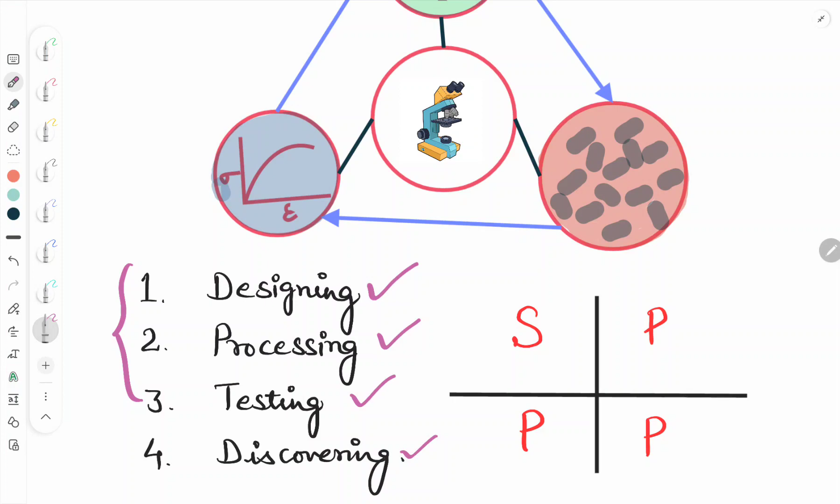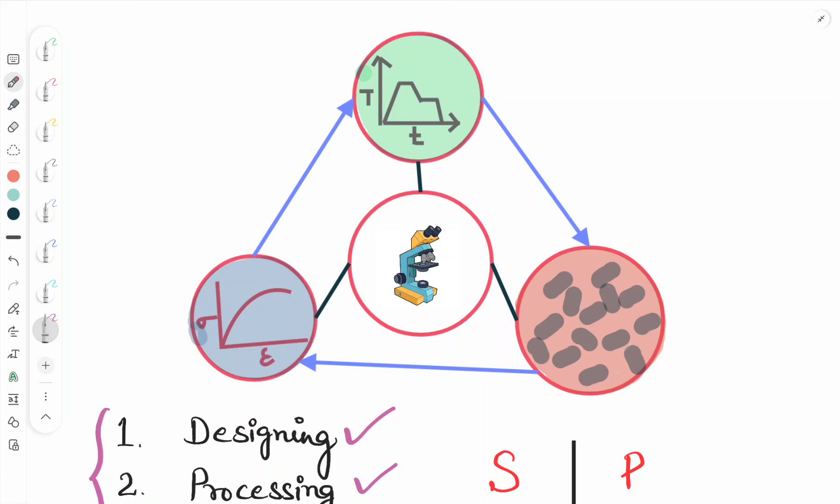Materials engineering is basically about designing, processing and testing, and with these three combined there is discovery of new materials, mainly solid materials. If we are trying to discover any material, we will see a few criteria: first is the structure of the material, second is the processing conditions, and what are the properties exhibited by that material, and how is the performance.

So this is the model on the basis of which we see materials discovery: first structure, processing, second, third property and performance. This is how we try to discover a new material.

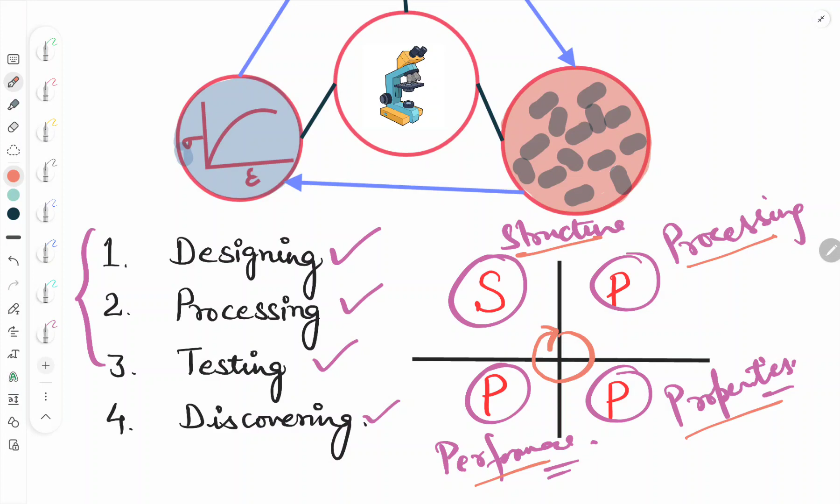Suppose if we have chosen any material, with the processing conditions we will see what kind of treatment we have given to that material, and what is the microstructure of that material, and what properties are exhibited by that material. This microstructure will be evaluated with the help of some characterization techniques.

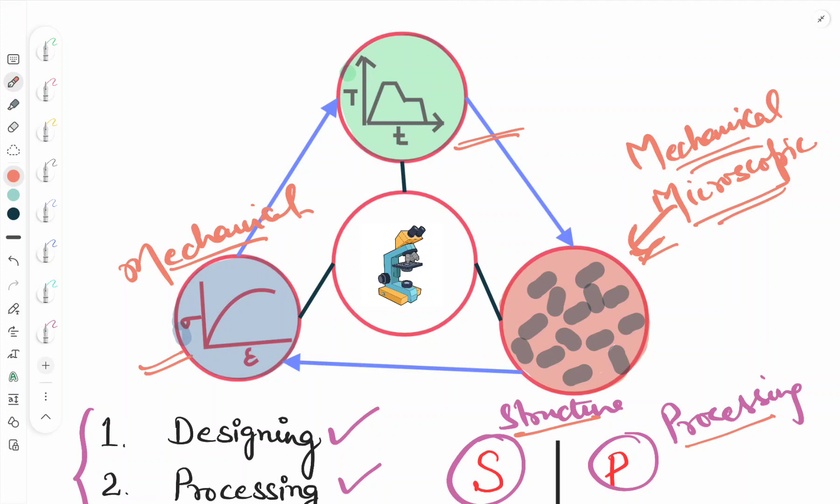There are material characterizations, in which mechanical characterization is one, and next is microscopic characterization. With the help of these conditions we will pick out the exact material for some specific application.

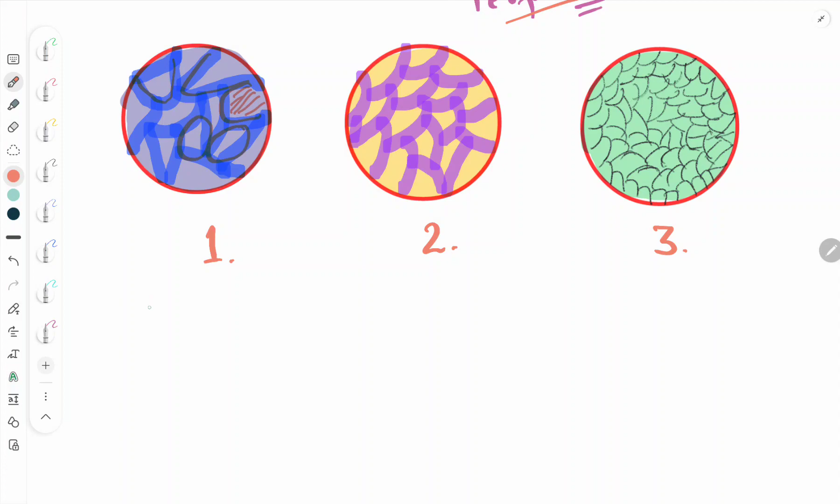Now there are different kinds of microstructures of materials. In the first condition, we can see bigger kind of grains. If we consider this picture as a grain, this is bigger grains, so this is coarse grain. In that case generally the material will have a lower strength or lower mechanical property.

One of the mechanical properties is strength. In this case we can see fine grains, smaller than the first condition, so the strength will be higher.

And if we see the third case, that is ultra fine grains, this will give high strength. So generally the mechanical properties of a material are defined by its structure.

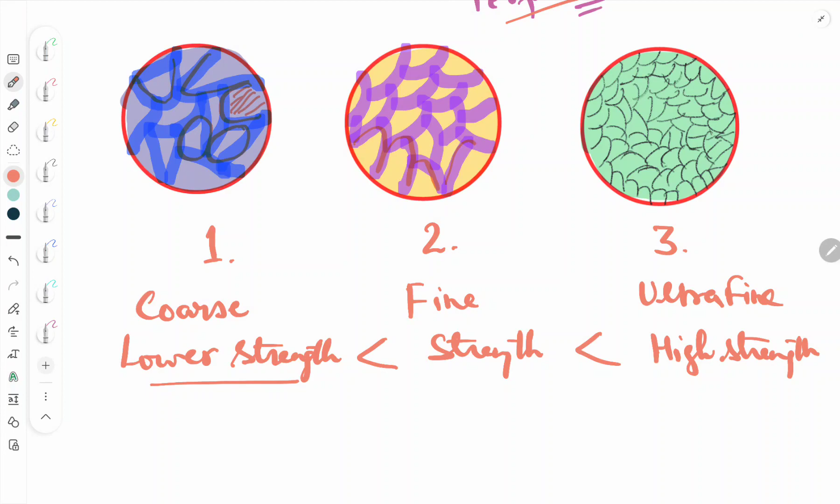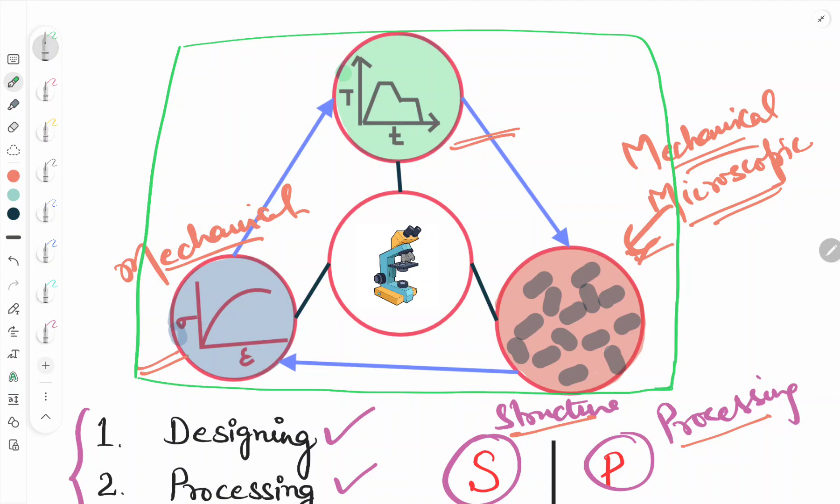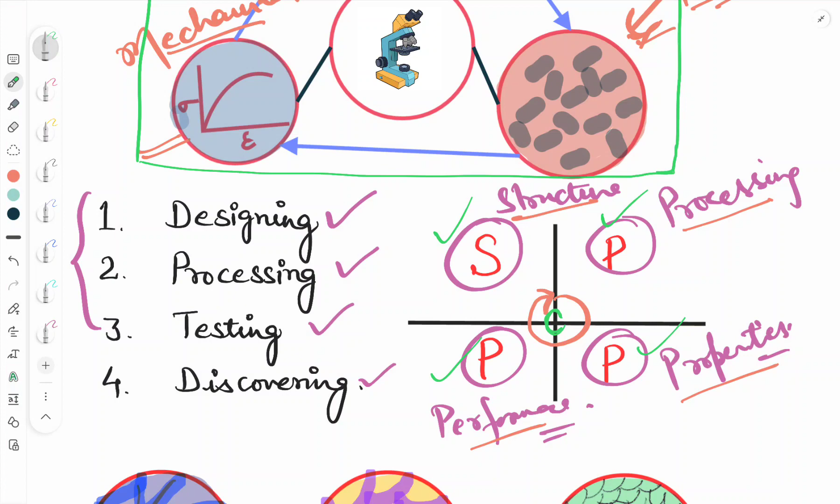Generally if anyone does a Google search just to know what is materials engineering, they will first see this kind of picture that tells about the structure of the material, the processing condition, the properties of that material, the performance of that material, and what kind of characterization is used to know about the microstructure of that material. Generally we will see this kind of tetrahedron about materials first.

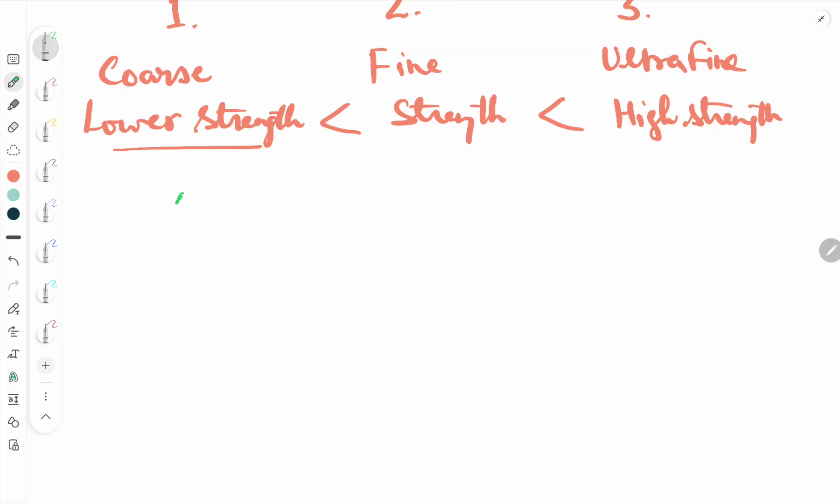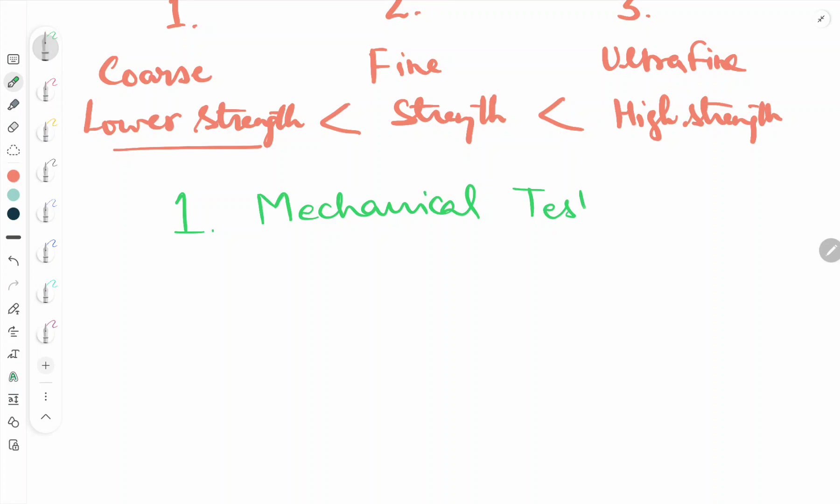Now we will see some other things, like if any material is put into application, before that there are basically two criteria the material has to go through. First one is testing, that is mechanical testing or mechanical characterization, you can call it.

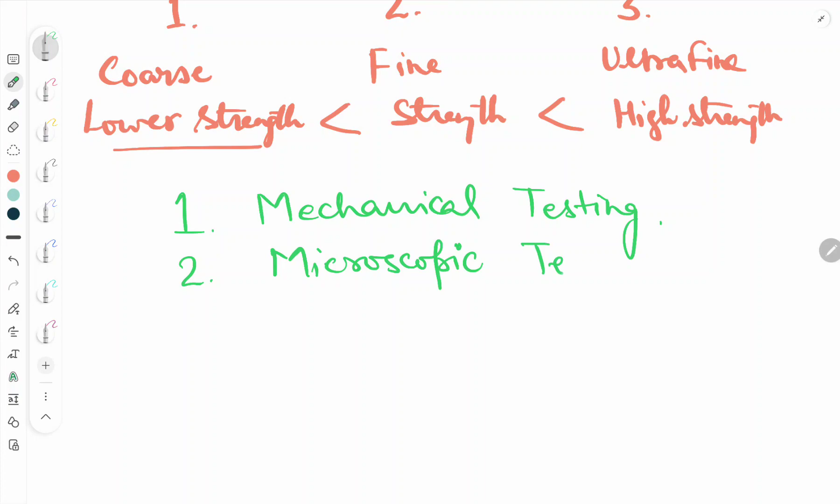Second is microscopic testing, that is also a kind of characterization. These are the characterizations which we perform before using the material in service conditions or in application for any purpose.

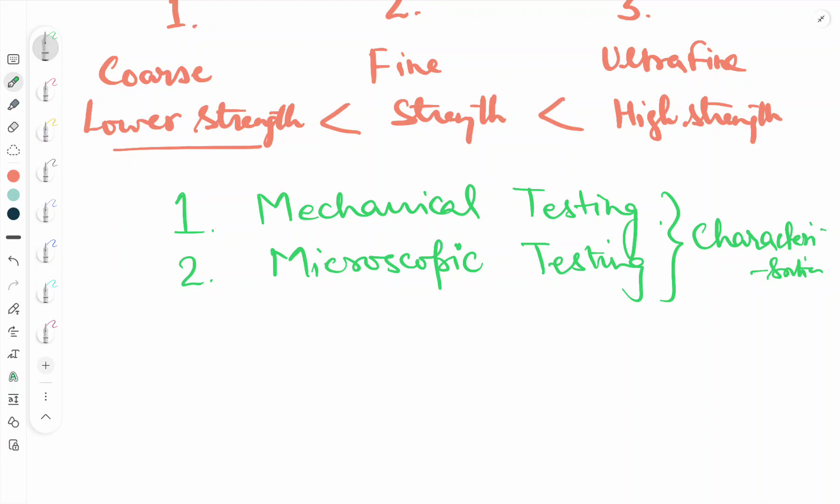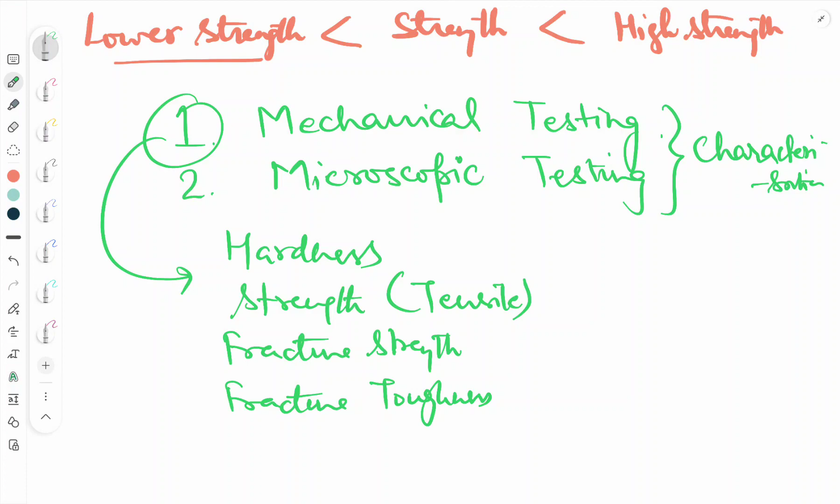In mechanical testing, for the first case, generally we do hardness test, we do strength test, that is basically tensile strength or tensile test, we do fracture strength test, and fracture toughness test. These kinds of tests we usually do to qualify the material for a service condition.

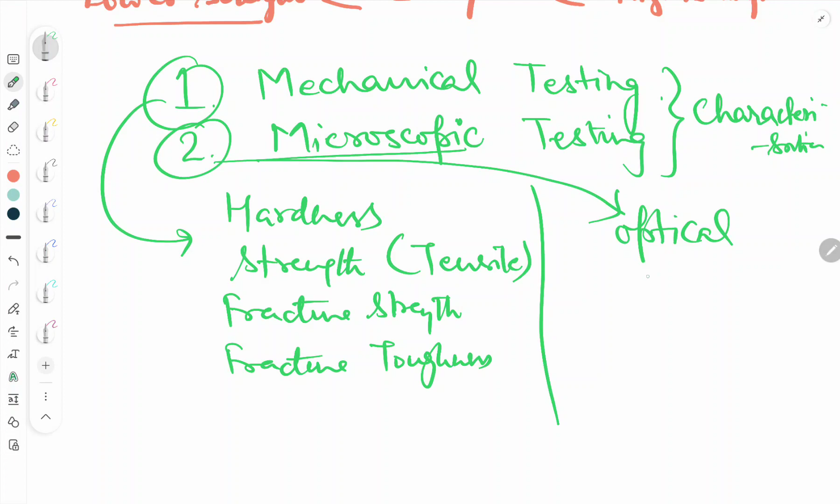About microscopic testing, we do optical microscopy, just to know about the microstructure of a material at a lower length scale. Then we go for SEM, that is scanning electron microscope, then TEM, that is transmission electron microscope.

In the modern era, with the availability of characterization tools, we have some advanced tools through which we can know the fraction of precipitates available, or the shape and 3D picture of the precipitates also. For that we can go up to APT, that is called atom probe tomography. So this is how we go about the characterization of a material, mechanical or microscopic characterization.

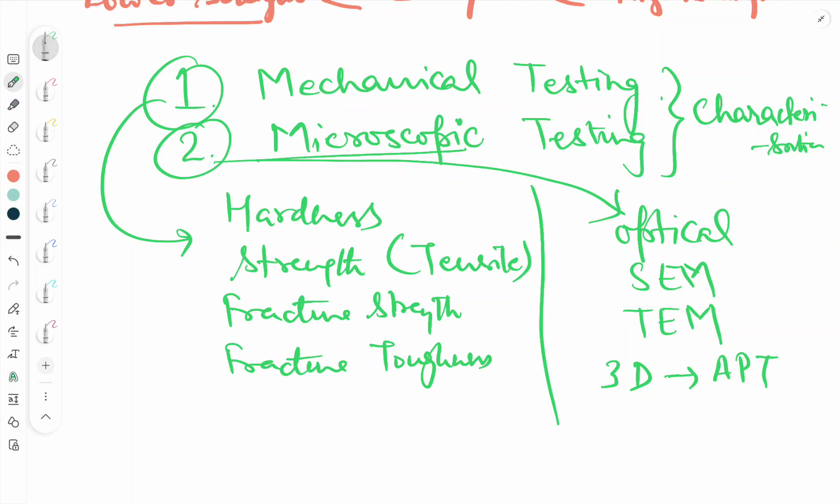So now we will talk about the careers and opportunities in which materials engineers can work and explore this engineering field.

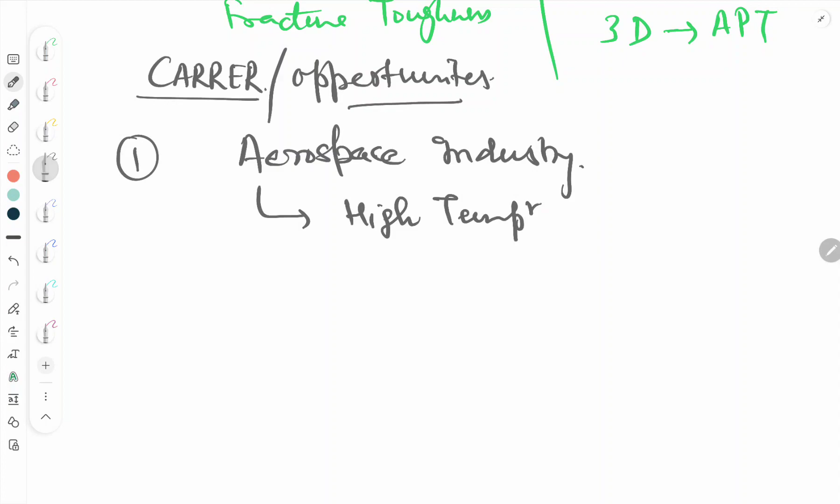So first is aerospace industry. Here materials are exposed to very high temperature applications, like for example, if there is a jet engine, it will have some major components: first is compressor, next is injector, then combustion chamber, then the gas turbine, and the last here will be that jet exhaust nozzle.

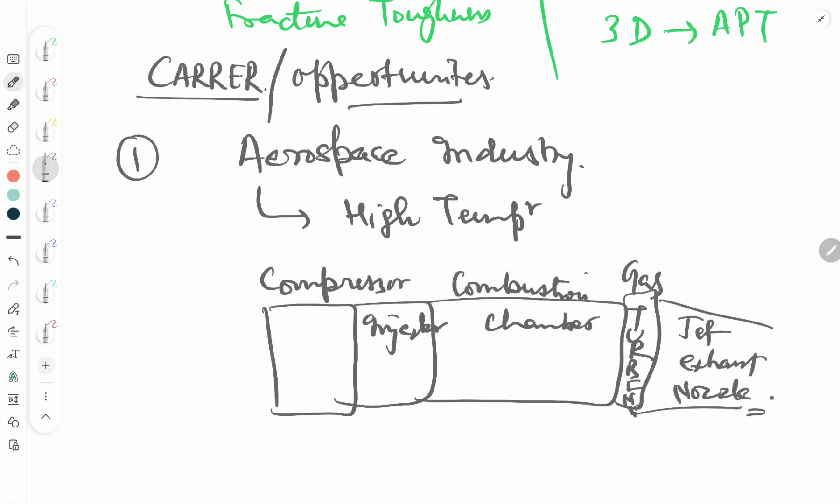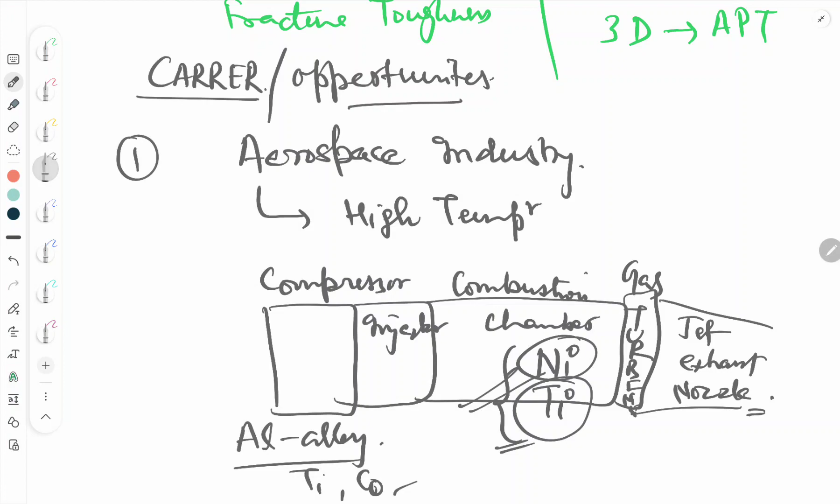So in the jet engine we have different sections, and in those sections we need different kinds of materials. Like in the combustion chamber we use Ni based superalloy, Ti based superalloy, because these alloys have higher strength at higher temperature. A jet engine also requires many kinds of alloys like aluminum alloys, composites, Ti alloys, and cobalt based alloys. So this is how it requires different kinds of materials. This is how materials engineers can explore well in the aerospace industry.

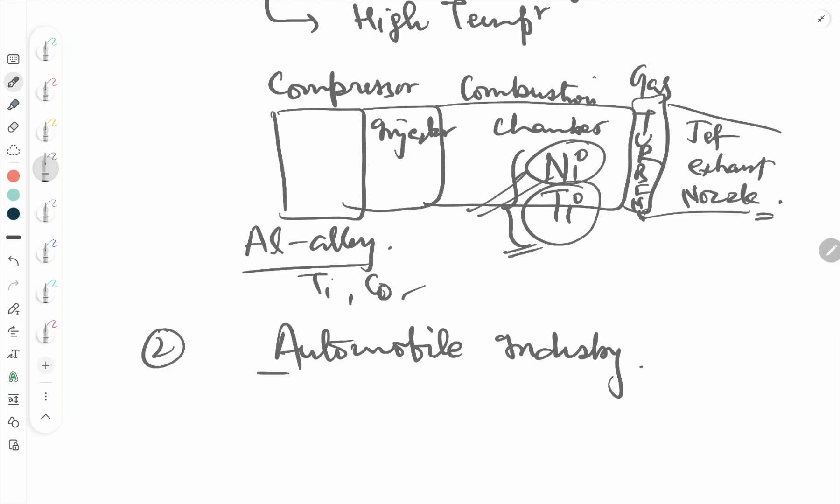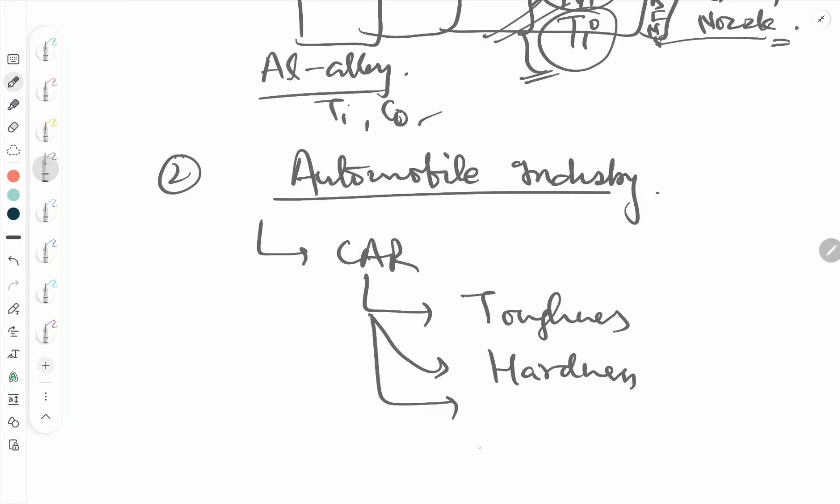And the next one is automobiles industry, in which if we have a car, it has different parts, some having very high toughness requirement, some requiring very high hardness value, some requiring wear property, some requiring resilience, and some a combination of strength and toughness.

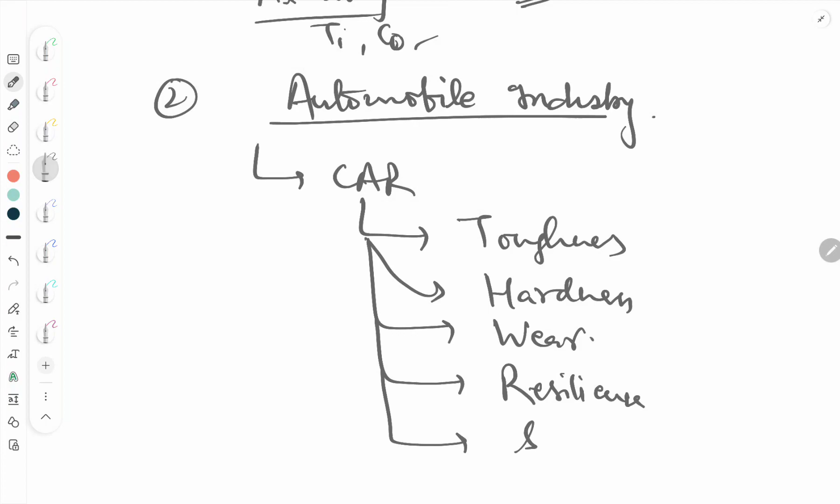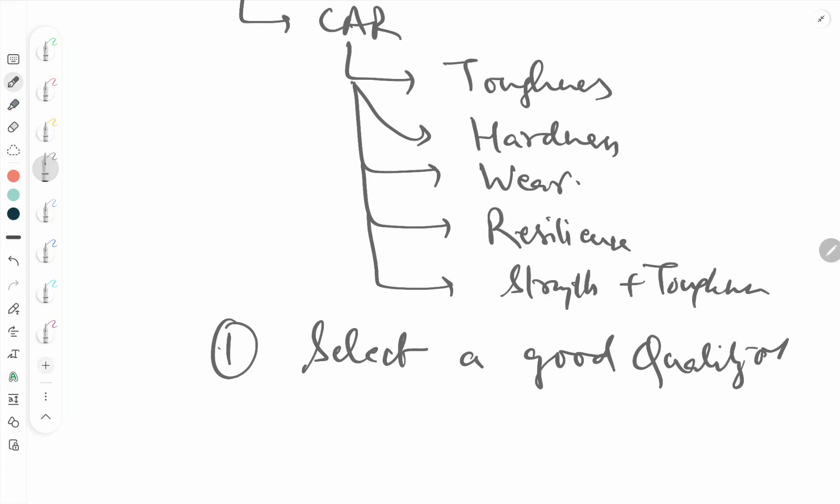So this is how one can explore well in the automotive field to select a good quality of material to provide a quality automotive component.

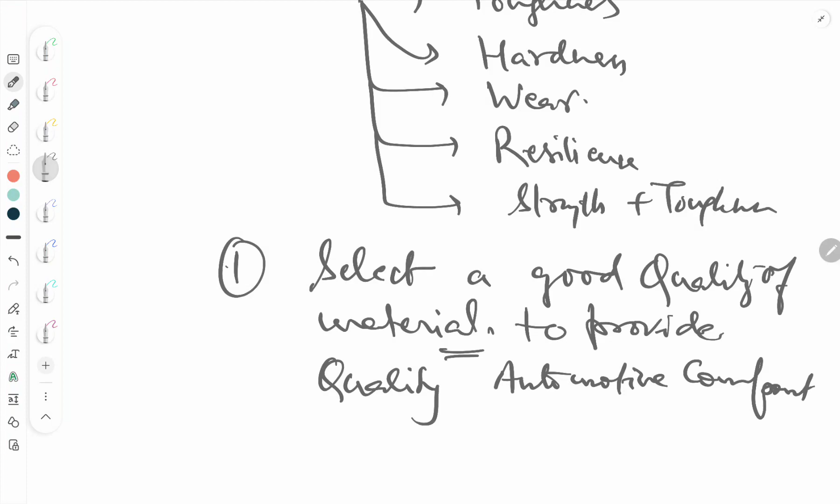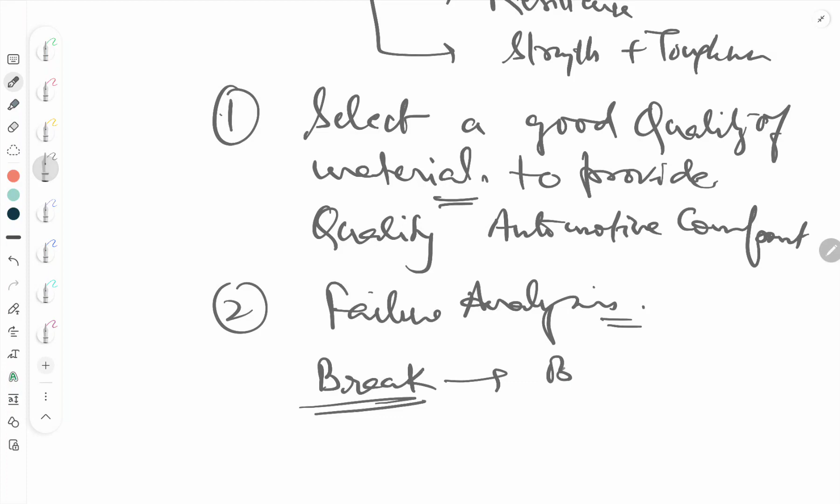Next is failure analysis. So in any industry, if any part breaks, the broken part will be taken to the laboratory for different kinds of microstructure analysis. That is also the most important field in which materials engineering can explore well.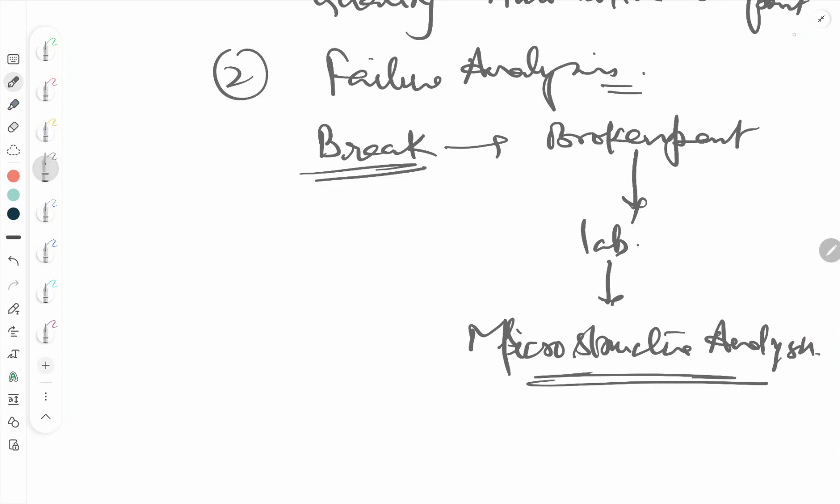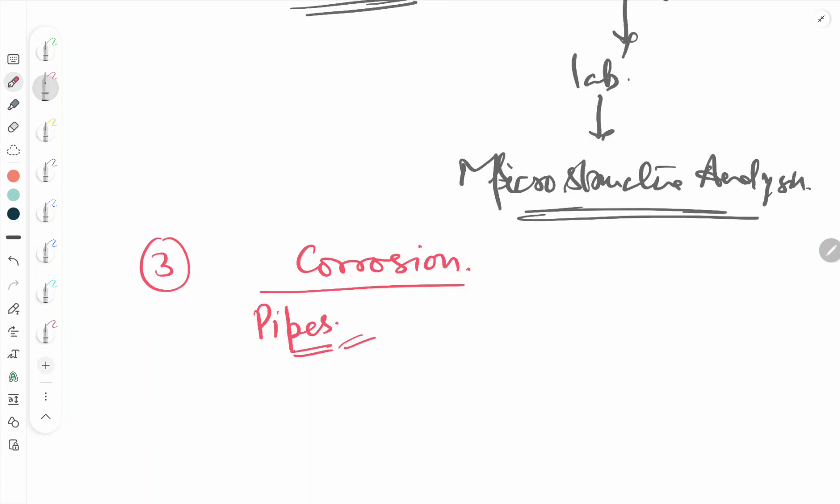After aerospace and automotives, we'll come to the third one, corrosion. Many pipes are subjected to the flow of different kinds of fluids, and many components are put into water, or different kinds of things like fresh water, salt water, oil. So the material is exposed to different environments, due to which the chances of corrosion are different in every case. So one can explore well in the field of corrosion to increase the life of a material and reduce the corrosion rate also.

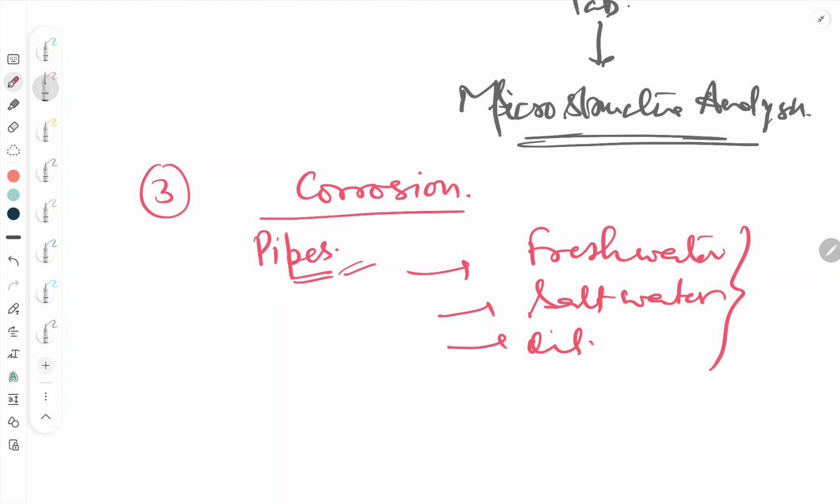And next is biomaterial, by constructing or making artificial organs, or to replace bones or tissues.

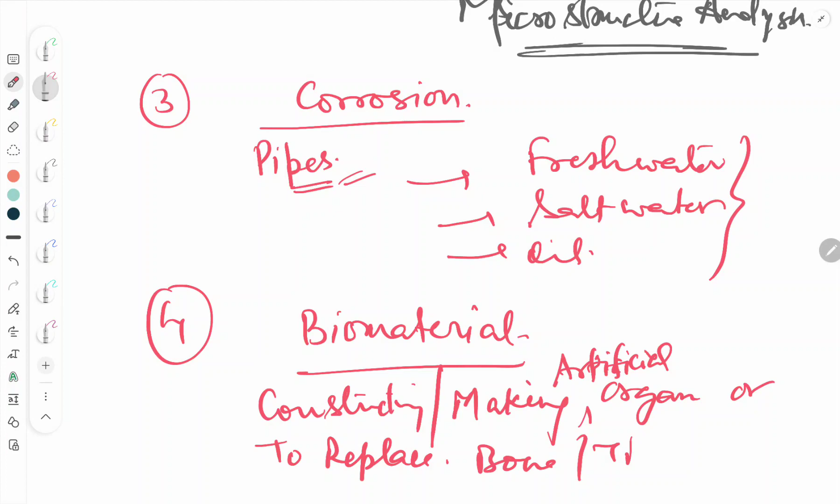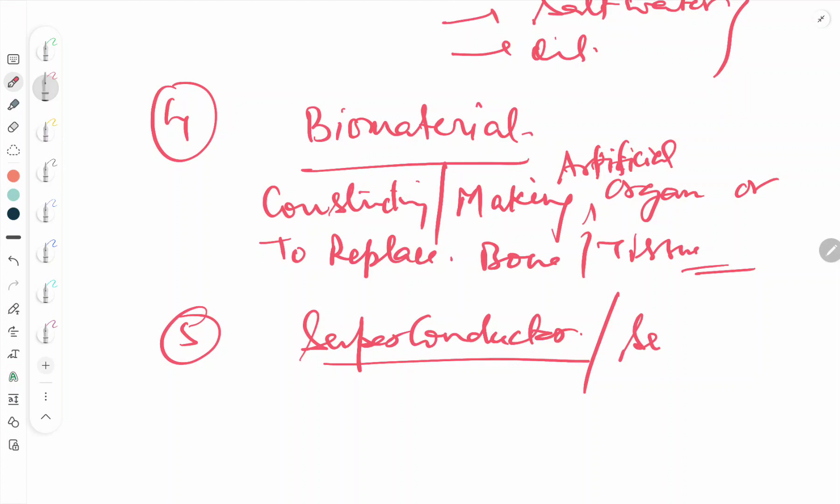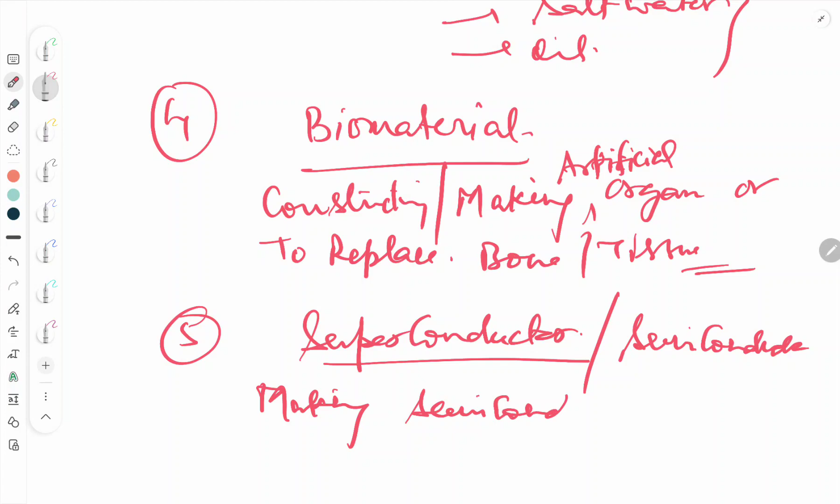And one can also explore in the field of superconductors, at semiconductor fields, making semiconductor devices. As the world is leading towards digitization, the requirement of semiconductors will increase day by day.

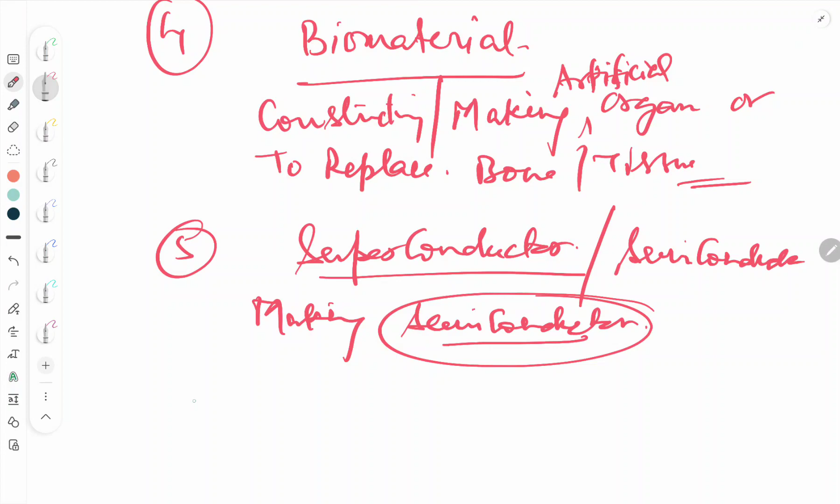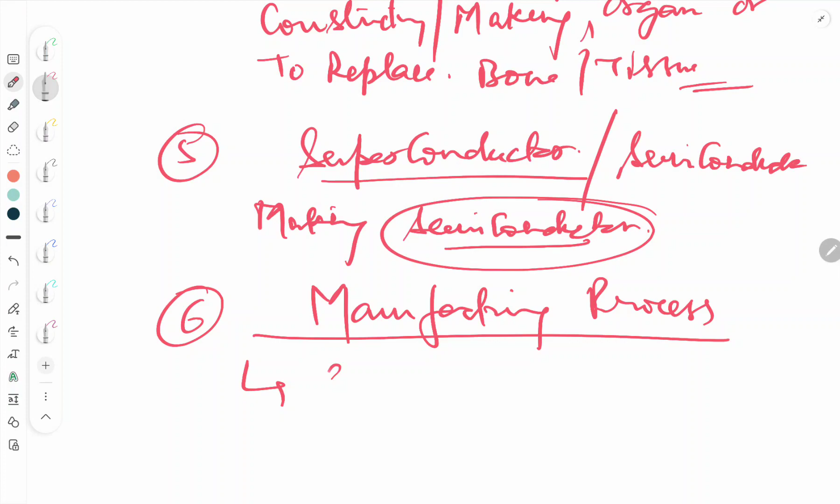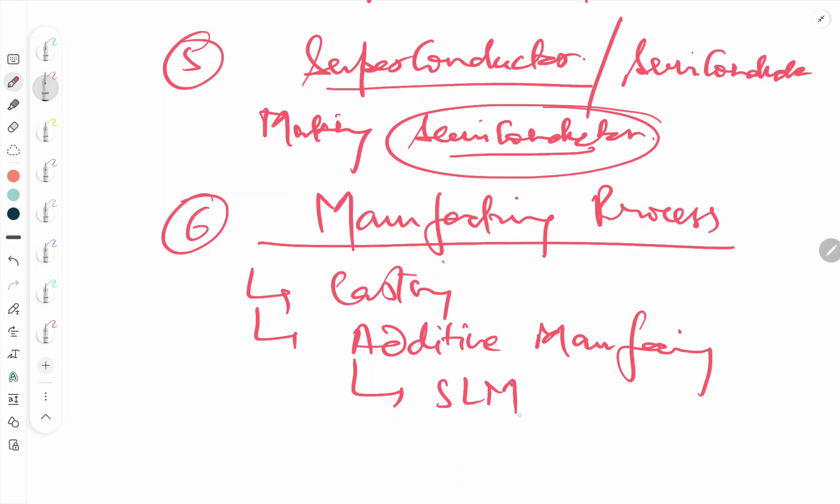And next, manufacturing processes, like how the component is being made. Previously we made things by casting, and now the era is moving towards additive manufacturing, in which there are some most common techniques like selective laser melting and direct energy deposition, in which people are trying with laser and powder for the same. So this is how people can explore well in the field of manufacturing process for developing useful materials.

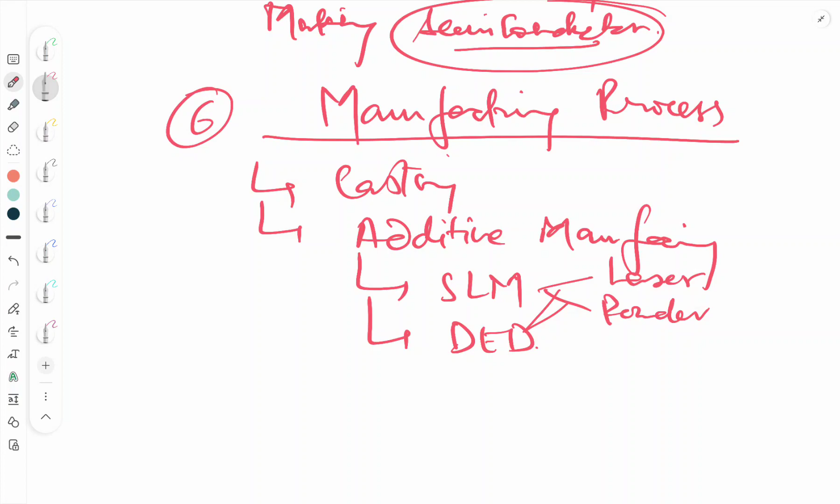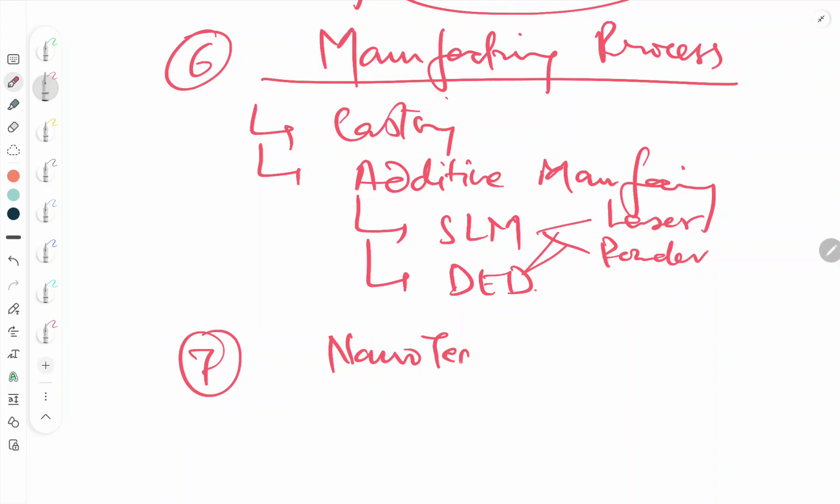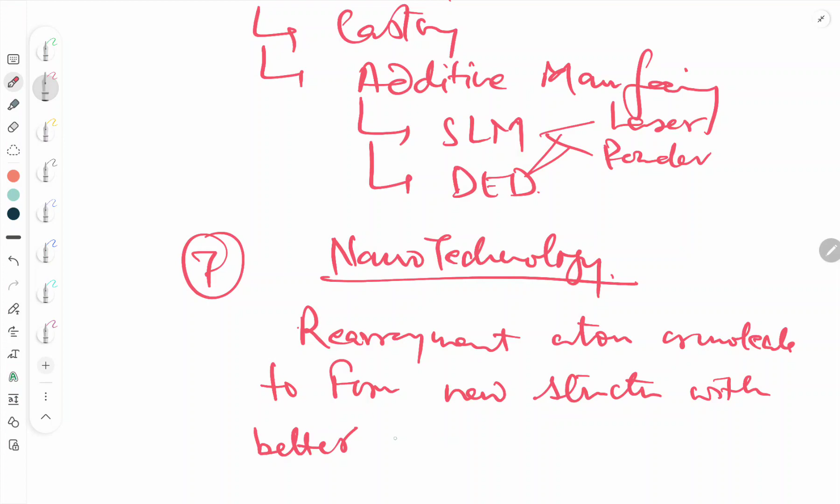For the applications. And another field is also nanotechnology, rearranging atoms and molecules to form new structures with better electrical, mechanical properties.

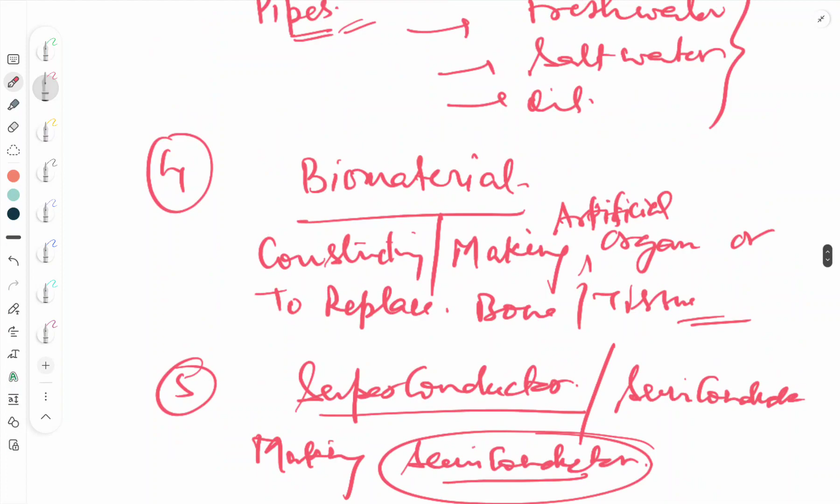So this is how we can explore the different fields in materials engineering.